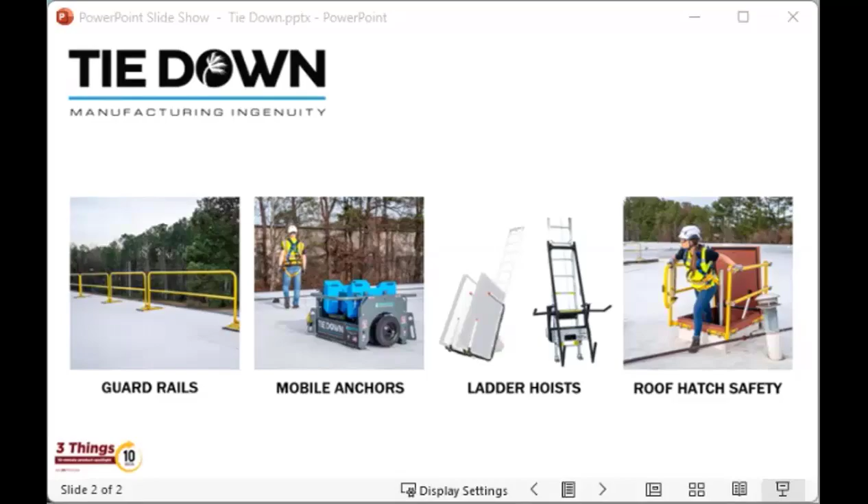And today we're going to focus on the mobile anchors, and we do have Linnea Rivera, who's the product manager at Tie Down Manufacturing, with us this morning. So we welcome her, and as we play some videos of the Squatch and the penetrating anchor, she's going to talk over them and give us the highlights of these items. So welcome, Linnea. What is the first one we're going to see today? The Squatch. Yeah, I believe the first one is the Squatch.

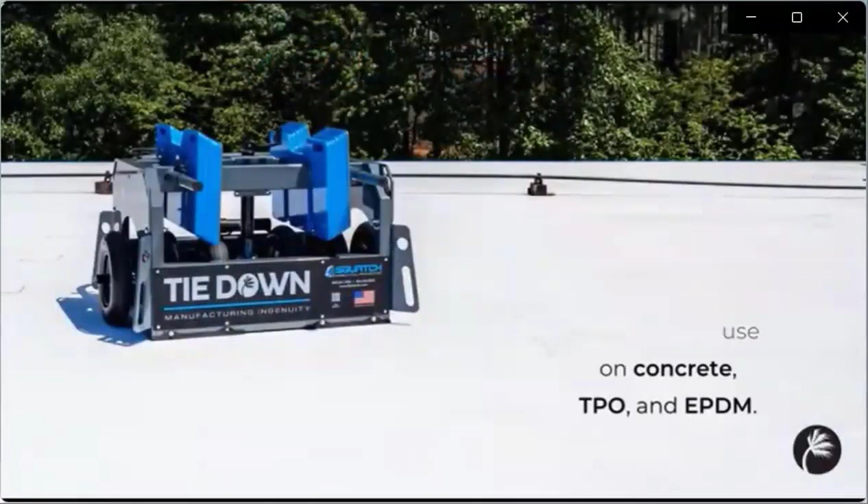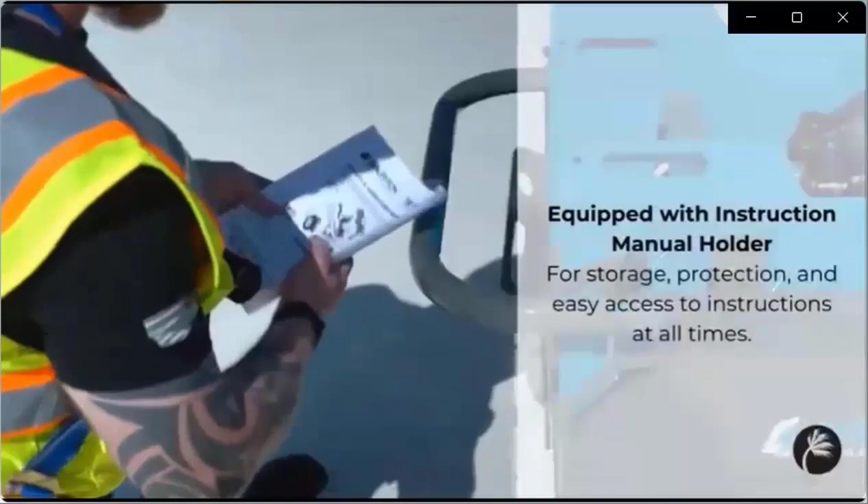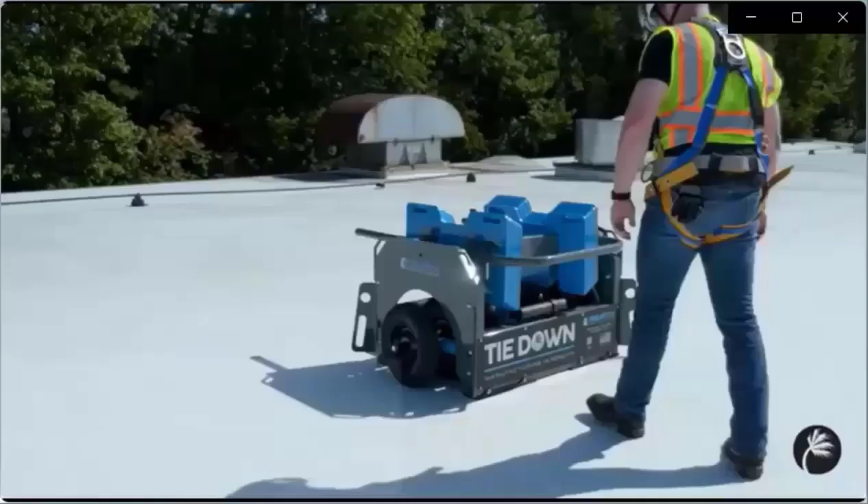So this is a mobile fall protection cart. It's a ballasted unit, so it is non-penetrating. Some key features here: if you have two Squatch units, you can put up to a 100-foot lifeline between the two of them, and you'll get 3 users in arrest on that lifeline and 2 users in restraint on each Squatch unit. So a total of up to 7 workers on that 2 Squatch with a lifeline system. An individual Squatch can get 2 users in fall arrest and 2 in restraint. So those are the key highlights there.

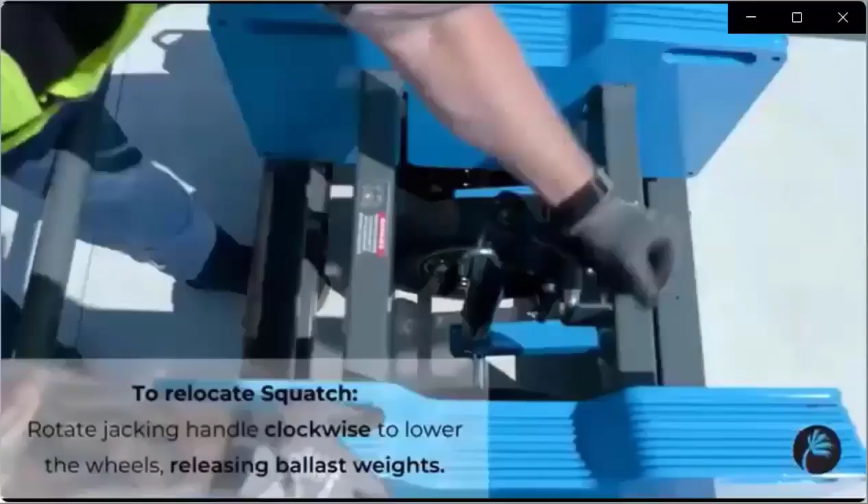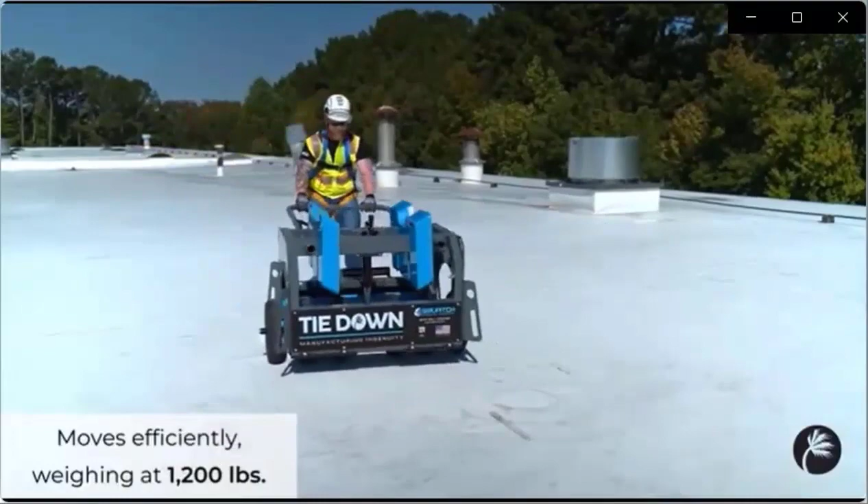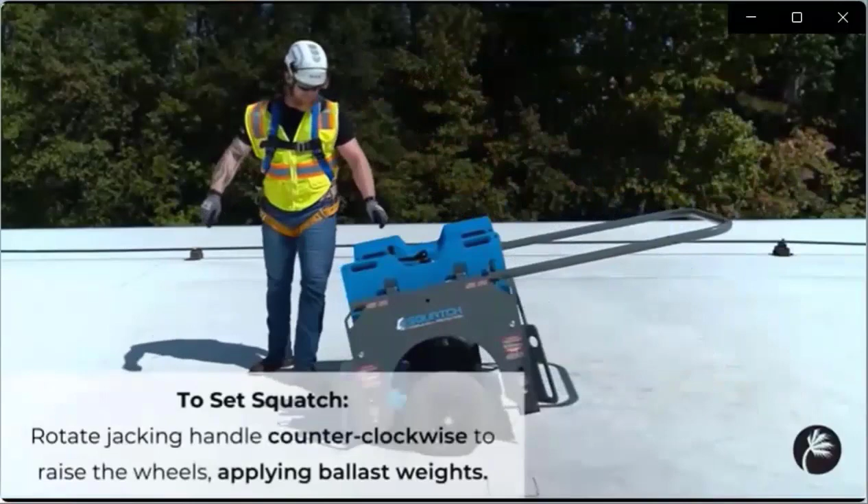The unit itself is about 1,200 pounds, hence it's a heavy ballasted cart. We have a smaller version, the Bigfoot, that's 750, a little bit smaller footprint. So if this is too big of a footprint or too heavy for the roof, we have other applications. Showing here, basically you use the tongue jack in the middle, and that's going to lower your wheels, which gives you the opportunity to roll it around, set it in place, and get ready to start using it. Just him wheeling it down.

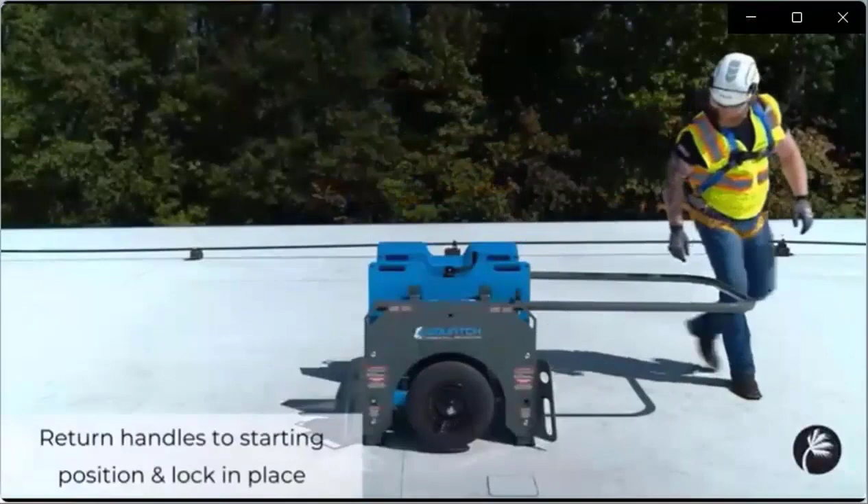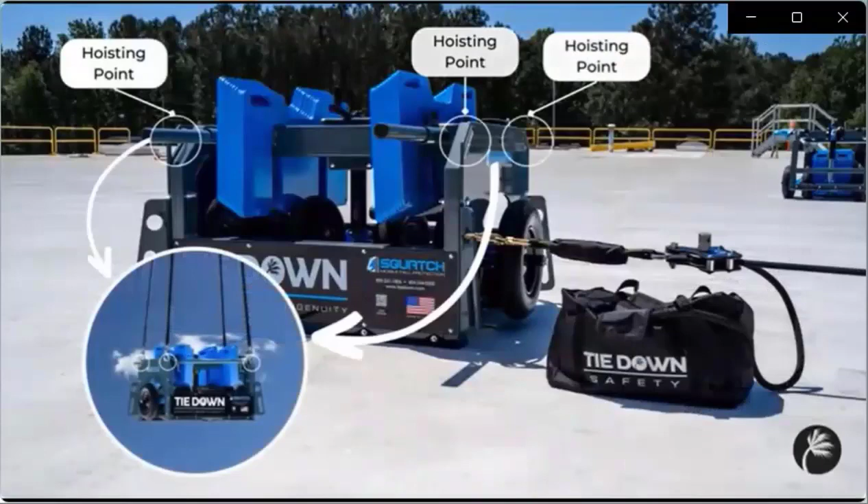One thing that's important with this product is you want to make sure that the wheels are all the way off the ground prior to use. So that's why we always say, make sure that they're free spinning after you put it in its final location. Just setting it up, getting it in place. This is definitely one of our bigger sellers. So here again, highlighting how useful it can be with getting up to 4 workers on 1 unit. Basically just crane it up to the roof, wheel it to location, and get started.

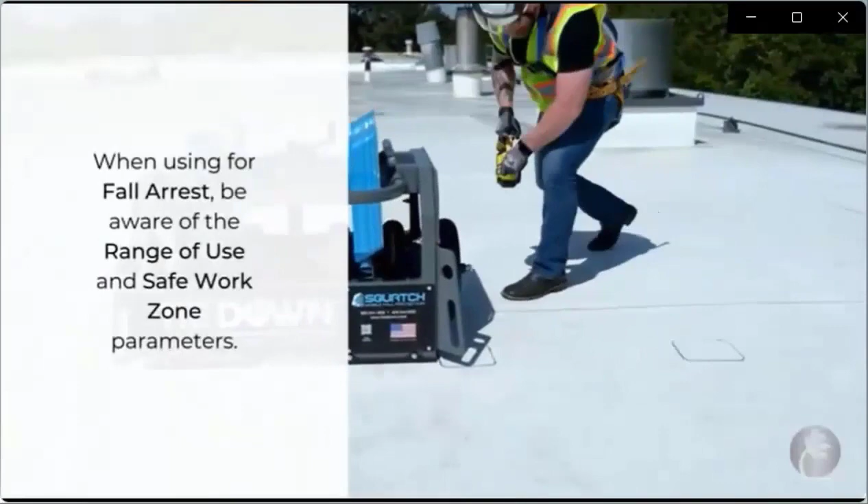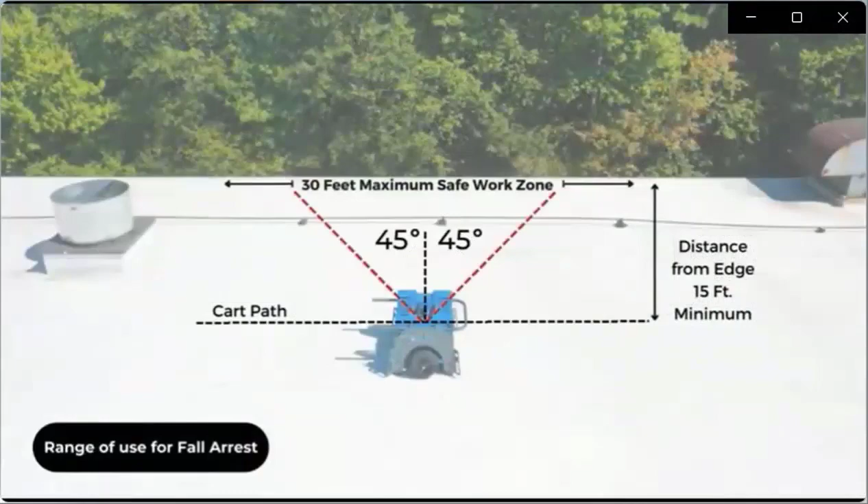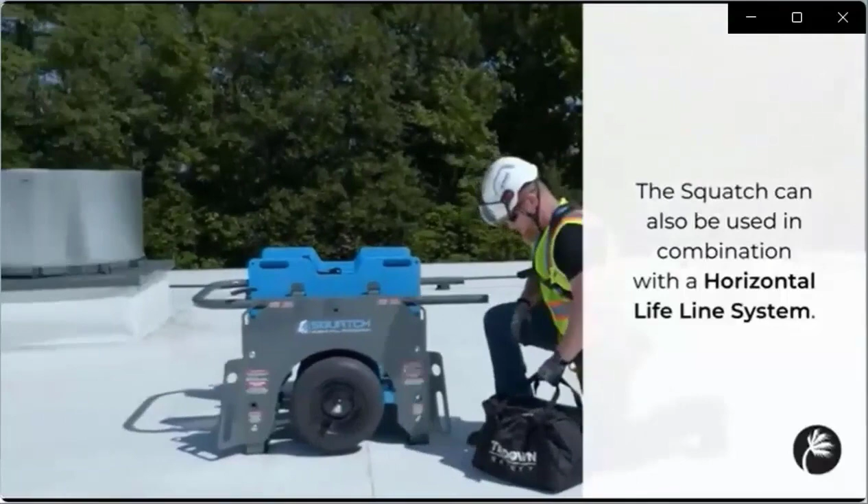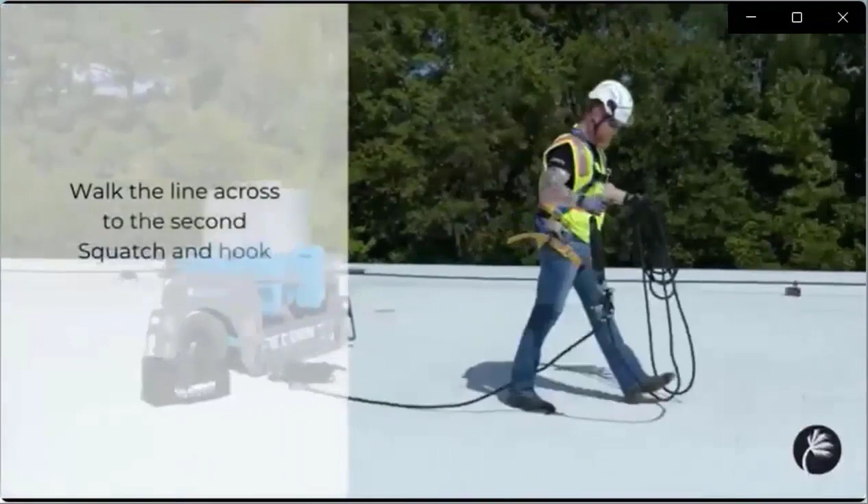Wow, that is a heavy unit. Yes, but I can move it around though. The way it's engineered and the weight distribution of it makes it relatively easy to move around, and also having the 2 tires on there distributes the weight, so it just moves around like a wheelbarrow. It's deceiving to think that you can move that much weight that easily. Right. Do the ballasts come with it? Yes, it'll be fully ballasted when it arrives.

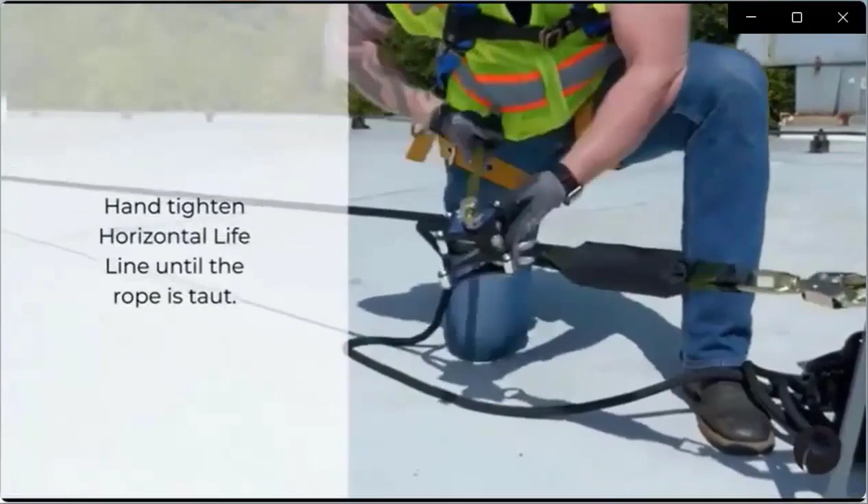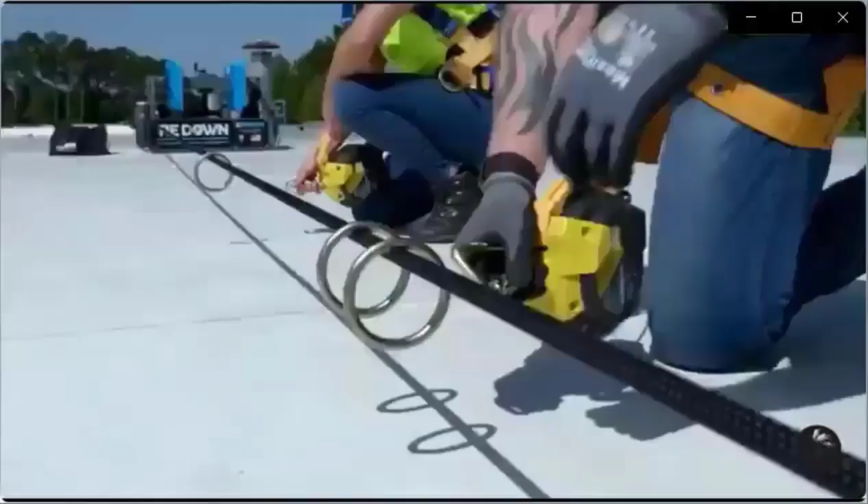So this lifeline kit is a separate kit. And it comes with everything: the rope, the tensioner, the carrying bag, and the rings as well. Nice. And I think we're going to go to the penetrating anchor now. Right.

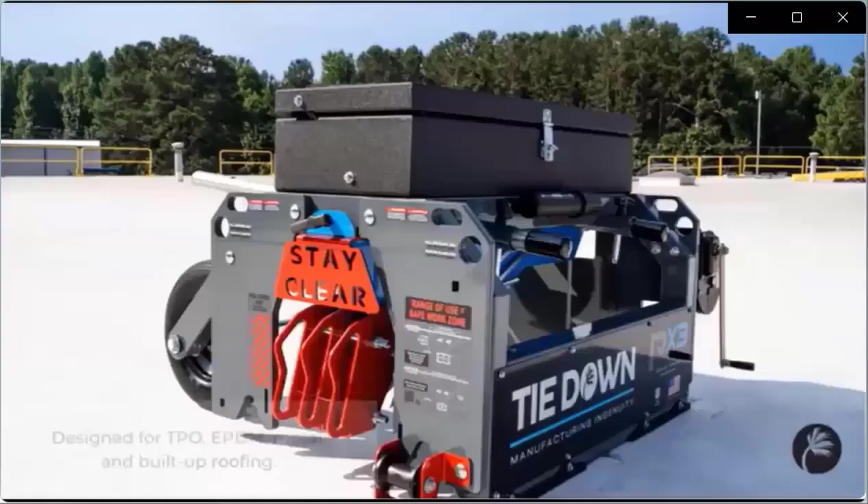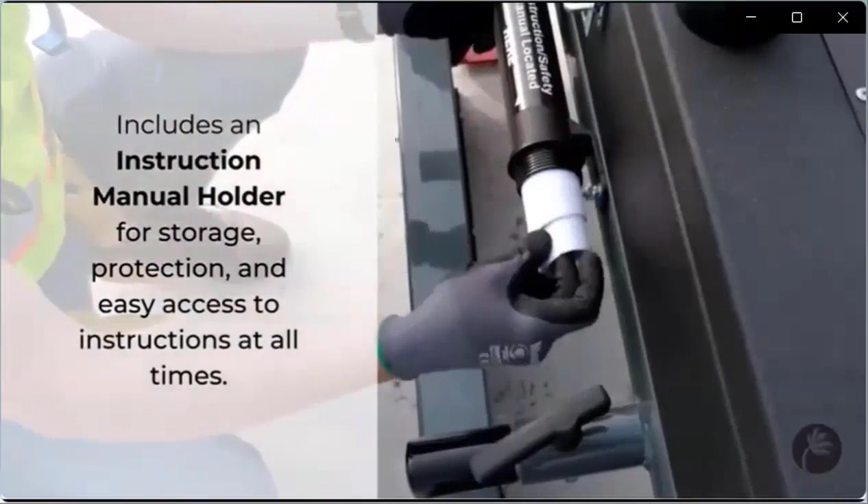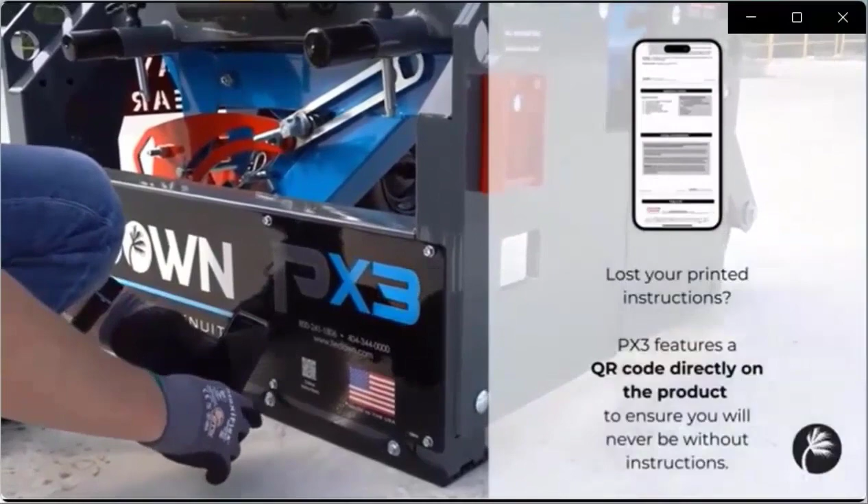Yes, okay, so now we're moving to the PX3, Penetrator X3. This is a penetrating roof cart. It's much more lightweight; I believe it's about 420 pounds. But with this cart, you can get 3 users in fall arrest and 2 in restraint. The way that this works is there is a claw on the bottom of the machine. So it's very similar, if you've seen the other products like the Tri-Rex. However, it's a much smaller unit and has the same capacity as those other units and competitors.

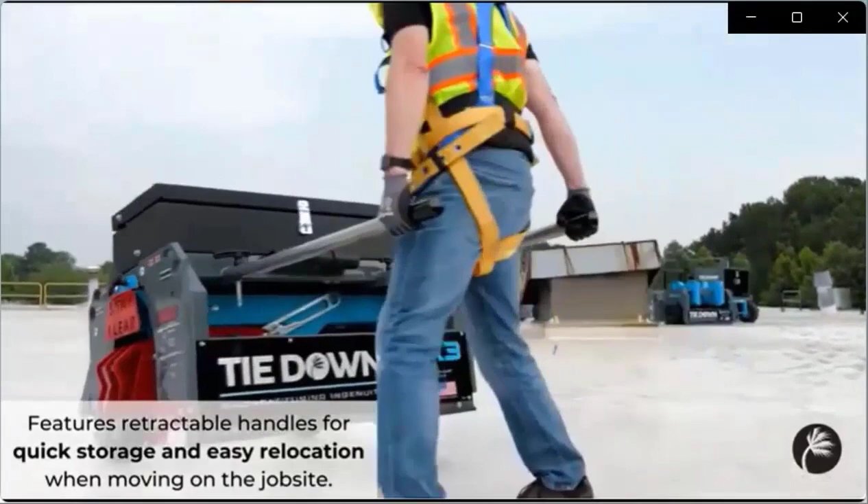Basically, the way it was designed was such a low center of gravity and the linkage system. So you hook into the front slots there, and then in the event of a fall, it'll trigger the claw to penetrate the roof surface. Moves around again, kind of wheelbarrow style. There's no jack for this one.

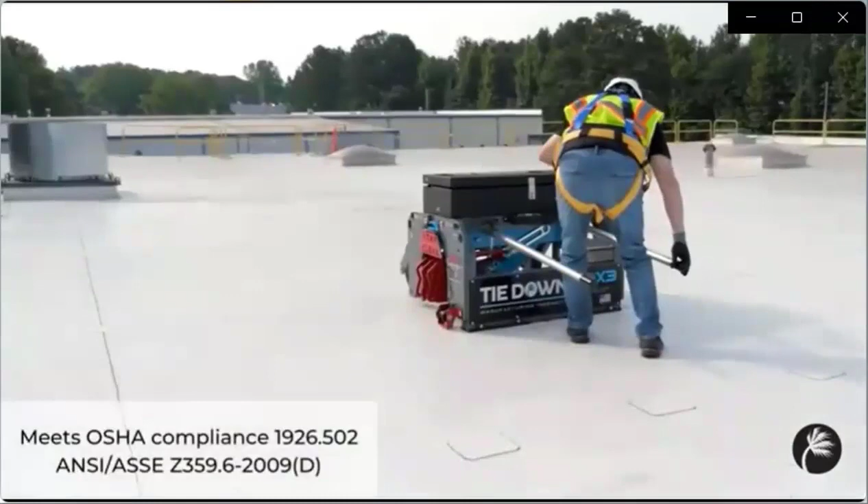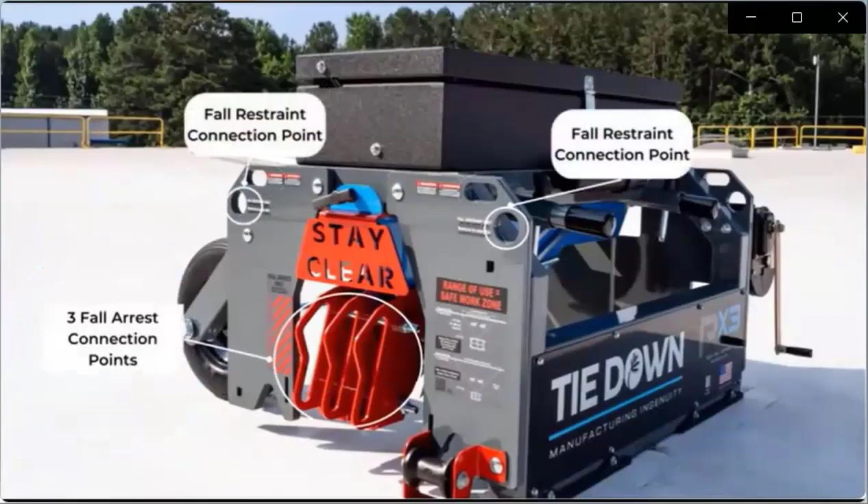You just put the tubes in and roll it around and place it to its location. And once you place it down, it's parked and ready for use. Some features: a toolbox with some gas struts in that, so it's easy to open, close, and very spacious to hold different items. Similar to the Squatch, hoisted up to the roof. And there's your 3 connections for fall arrest and 2 for restraint.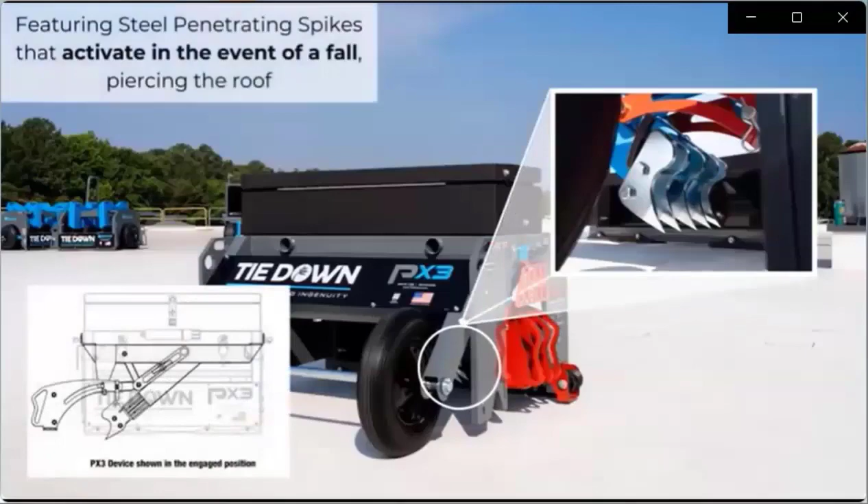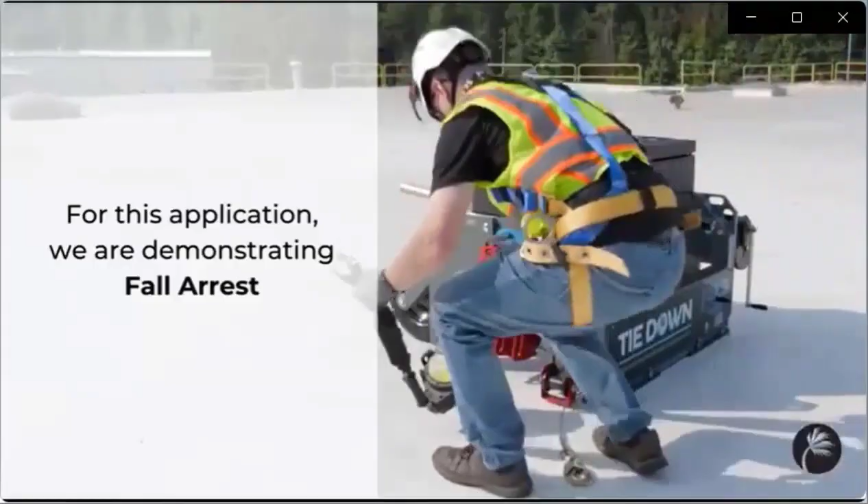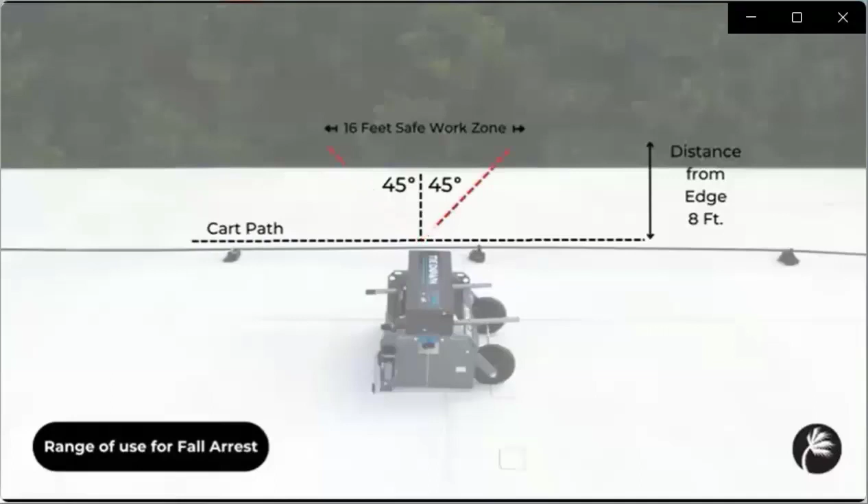Also, part of this unit is the ability in the event of a fall. It does come with, or you can purchase, the rescue winch system. So it already comes attached with the bracketry, and then if you buy the rescue winch system separately, in the event of a fall, you can put a manual winch on and raise the worker or lower the worker to safety.

So just a big advantage with this product overall, summarizing it, is to have such a lightweight unit handle up to 5 workers is a huge advantage in the industry. I imagine the roof surface is important for what type of anchor you utilize, correct? Yes, correct. And all of our instructions detail the recommended surfaces and non-recommended surfaces.

Basically all of our testing is done here at the facility. We have a test rig and we built coupons to test those different surfaces. So whether it's corrugated roof or TPO, different substrates, we make different coupons and test it on all of them.

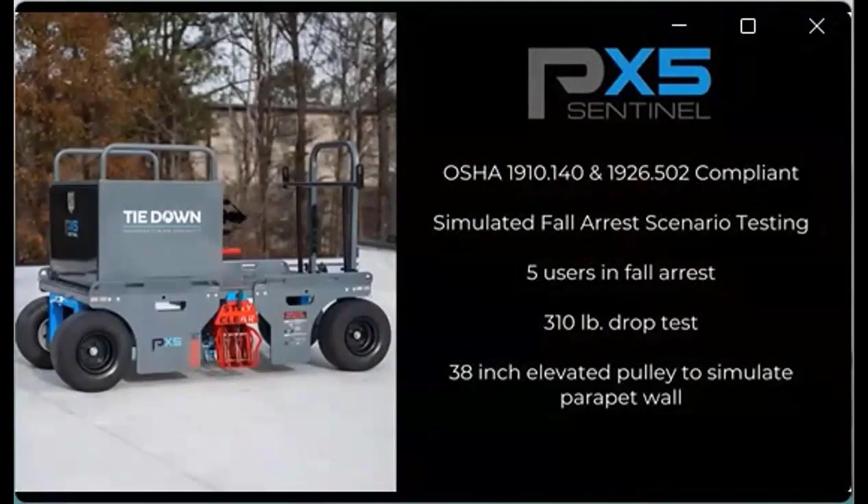What I've got queued up right now is a test video of the roof penetrating unit, the PX3, and I thought this was real interesting on how exactly this works. That's why these units could be so much lighter, is that they actually, in the event of a fall, will penetrate the roof. Is this your test facility there, Linnea? Yes. So all the items are tested at a 310-pound drop test with a 6-foot free fall. And that's how we certify all of them.

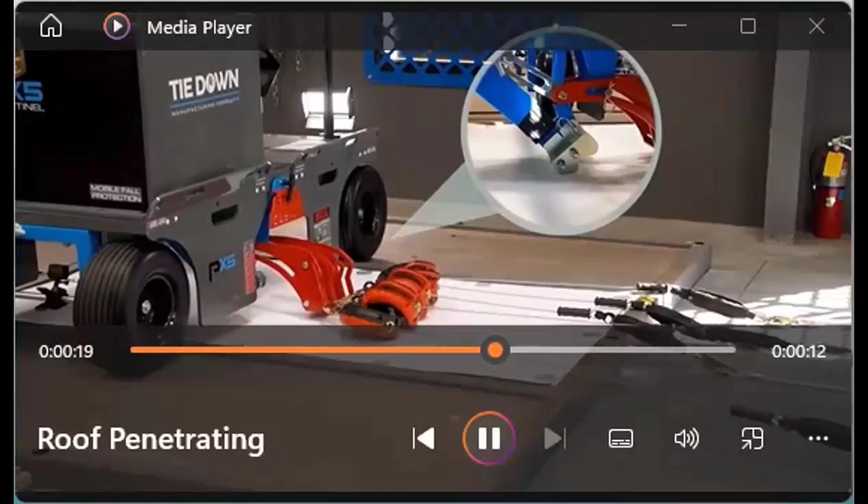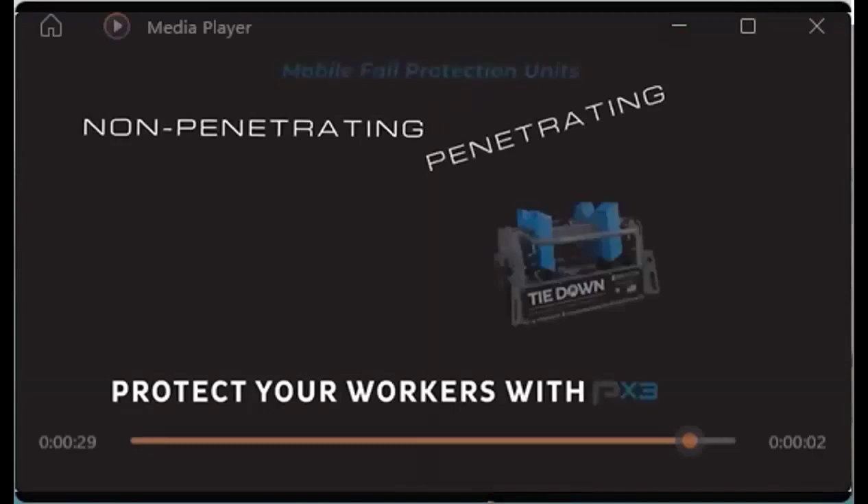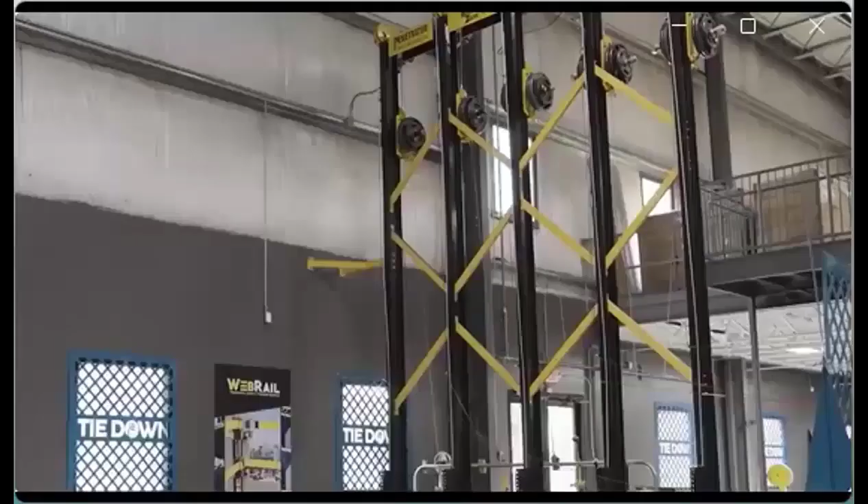This is an example of how it would react when using SRLs, because typically with an SRL you'll get less free fall. And so a lot of people ask, well, how much force do I need to deploy the claw? So just to demonstrate, whichever harness or whichever lanyard or SRL you're using, it'll still do that. Right. I'll just show this again, just how the claws, and that's why the roof surface is so important, because they have to penetrate in the event of a fall, and they just really dig into the surface there.

Yeah, and this one's our PX5, which is kind of our larger penetrating roof cart, and that one gets 5 users in arrest and 2 in restraint, and can also be used on concrete. Nice.